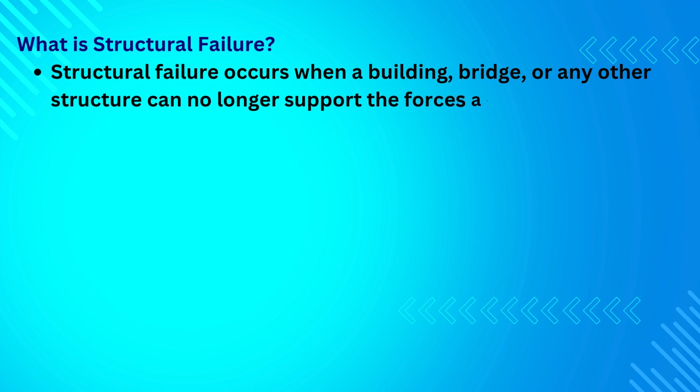What is structural failure? Structural failure occurs when a building, bridge, or any other structure can no longer support the forces acting on it. This isn't always as dramatic as a collapse. It could start as a small crack, a slight tilt, or a vibration that feels out of place.

For example, the Tacoma Narrows Bridge didn't collapse without warning. It began with oscillations caused by wind, which engineers later identified as aeroelastic flutter. This failure wasn't just about materials, it was about how forces interacted with the structure. Predicting failure involves understanding these forces and how structures respond to them.

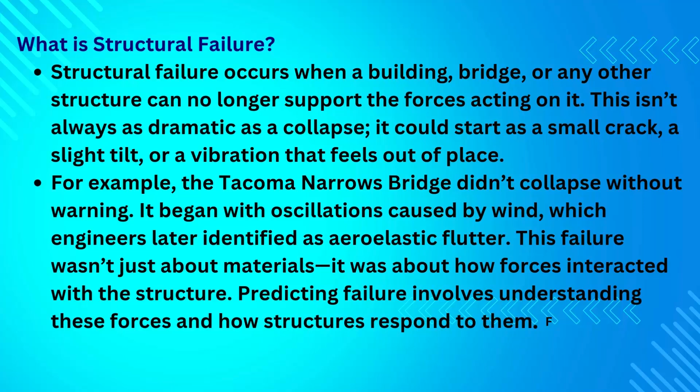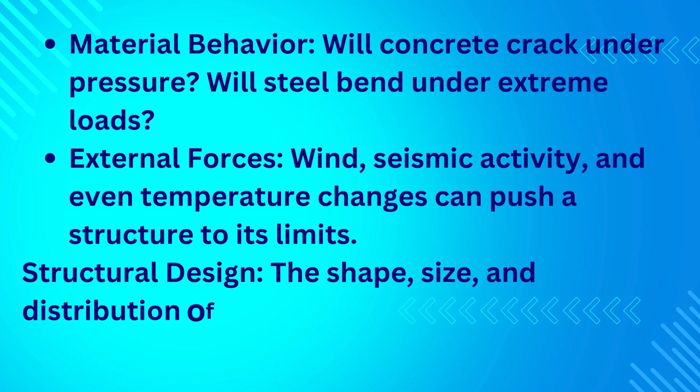Factors include material behavior. Will concrete crack under pressure? Will steel bend under extreme loads? External forces. Wind, seismic activity, and even temperature changes can push a structure to its limits. Structural design. The shape, size, and distribution of weight determine whether a structure can withstand applied forces.

Types of failures engineers look for. 1. Elastic failures. These occur when a structure deforms under load but doesn't immediately break. For instance, a slender column might buckle when compressed beyond its critical load, a phenomenon known as Euler buckling.

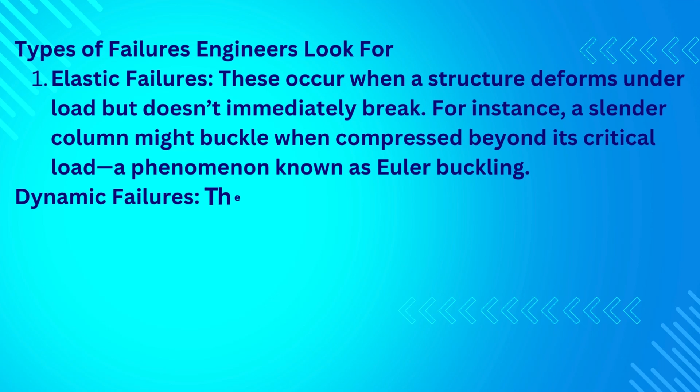2. Dynamic failures. These involve vibrations or oscillations that grow uncontrollably. The Tacoma Narrows Bridge is a classic example, where wind-induced resonance caused the structure to tear apart. Both types of failures can be catastrophic, but they're also preventable with the right tools and techniques.

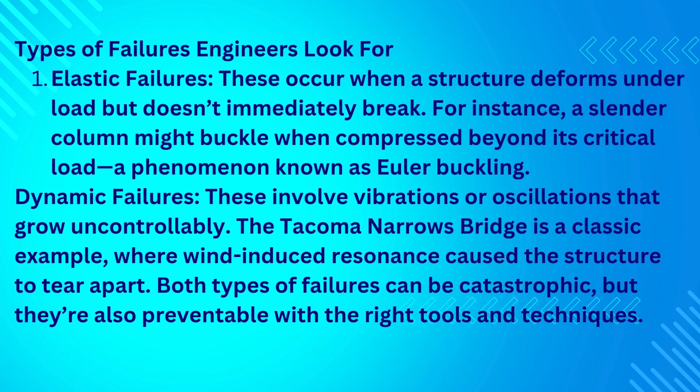How engineers predict failures. To prevent structural failures, engineers rely on cutting-edge tools and methods to identify risks before they escalate. Sensors and IoT. Smart sensors monitor stress, strain, and temperature in real time, acting as the structure's nervous system. Finite element analysis, FEA. This computational tool simulates how structures respond to forces, providing insights into weak points.

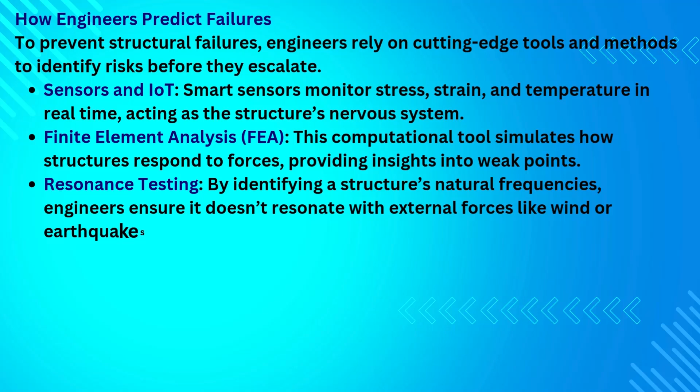Resonance testing. By identifying a structure's natural frequencies, engineers ensure it doesn't resonate with external forces like wind or earthquakes. Non-destructive testing, NDT, techniques like ultrasound or X-rays help inspect internal weaknesses without damaging the structure. With these tools, engineers can predict not just when but where failure might occur, allowing them to intervene before it's too late.

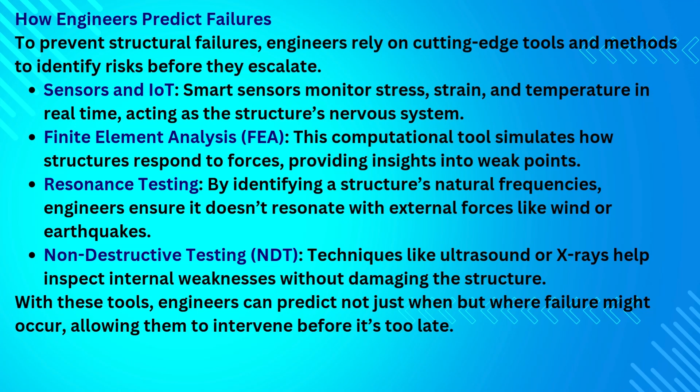Real-world applications. These methods are already making a difference. In Japan, seismic sensors send real-time alerts during earthquakes, giving people time to evacuate. In Switzerland, AI algorithms monitor snow loads on cable cars, preventing potential failures. And in skyscrapers worldwide, wind tunnel testing ensures stability in extreme weather.

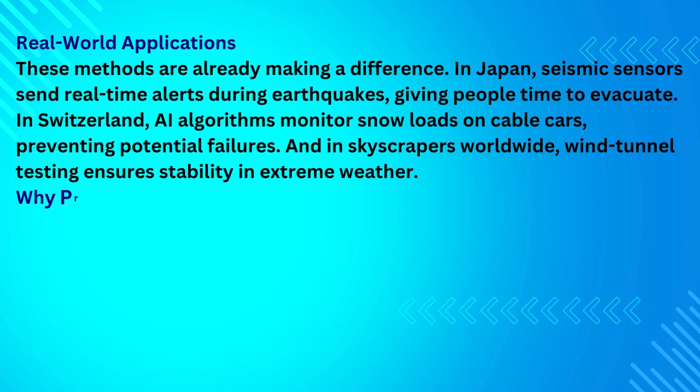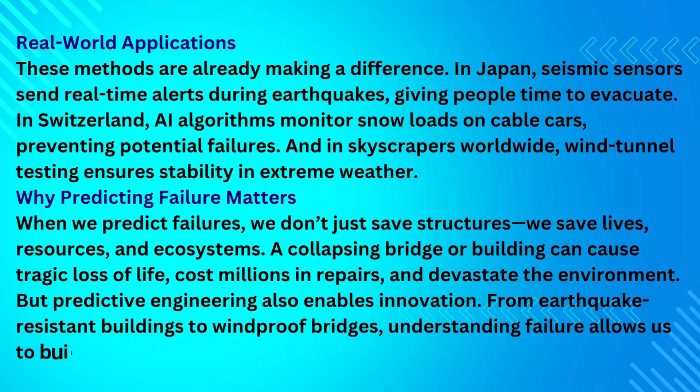Why predicting failure matters. When we predict failures, we don't just save structures, we save lives, resources, and ecosystems. A collapsing bridge or building can cause tragic loss of life, cost millions in repairs, and devastate the environment. But predictive engineering also enables innovation. From earthquake-resistant buildings to windproof bridges, understanding failure allows us to build structures that push boundaries while staying safe.

Conclusion. So, how do we predict structural failure? By combining engineering principles with advanced technology, we can detect problems before they become disasters.